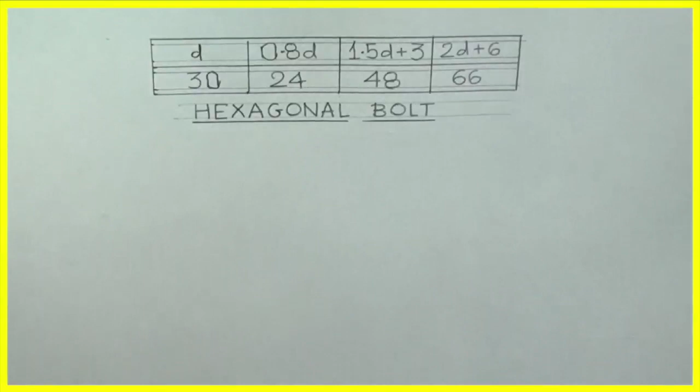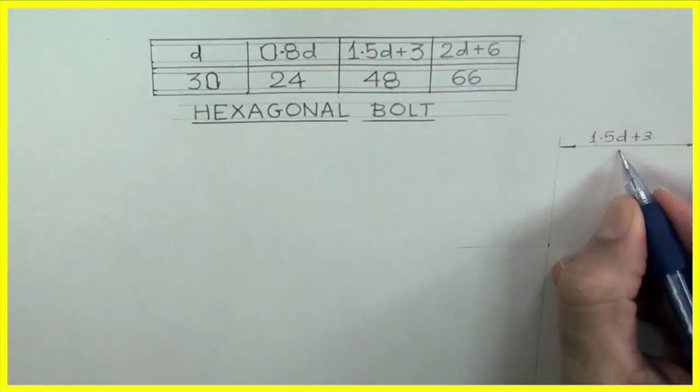Hexagonal bolt, D is equal to 30. So 0.8D, 1.5D plus 3 and 2D plus 6. We'll find out all these values and we'll start with side view. 1.5D plus 3 we will take. See, we can take 1.5D or 1.5D plus 6, but we will take 1.5D plus 3.

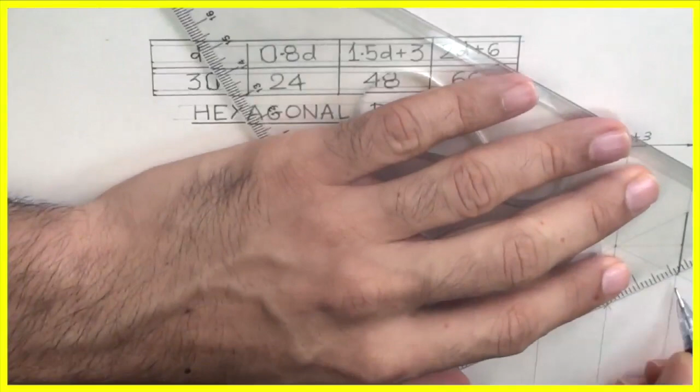And we will draw hexagon across flat. We'll draw 30-30 degree on both the sides and we'll get the side of the hexagon. After taking this side, we'll cut on middle line like this and we will get hexagon. Now why are we starting with hexagon? Because axis is parallel to HP and VP. So side view will give you true shape. So first we will draw hexagon.

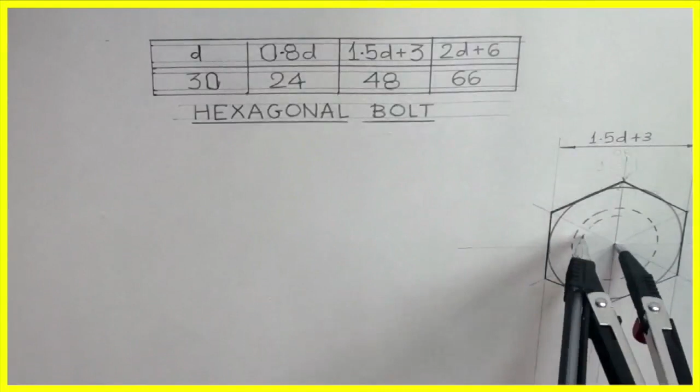After that we will draw chamfering circle. In nut and bolt we have a chamfering circle. So we will draw chamfering circle. After that we'll take D equals to 30. We'll draw this dotted circle and again we'll take 0.8D. That also we'll draw as a 3/4 quarter circle. See, diameter 30 and diameter 24. After that we will go for head of the bolt.

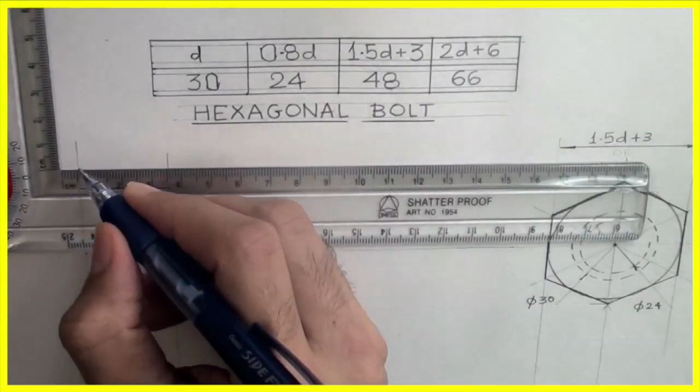We'll project from side view. We are drawing front view now. See this. This is 0.8D. It can be anything from 0.7D to D. So I am taking 0.8D. Then I am taking these two lines. Right? Now I'll take 60-60 degree with vertical. Wherever it will cut, from that point I can draw this middle radius. See this.

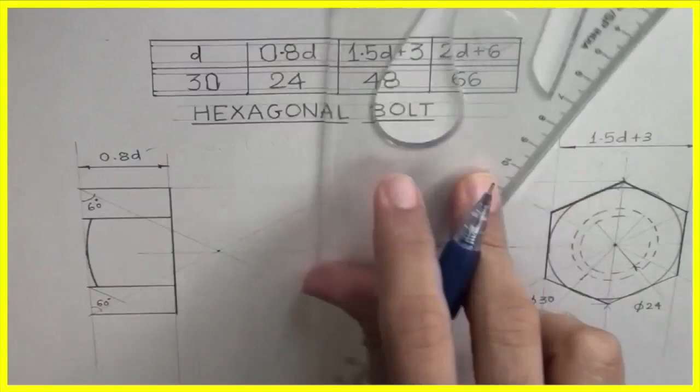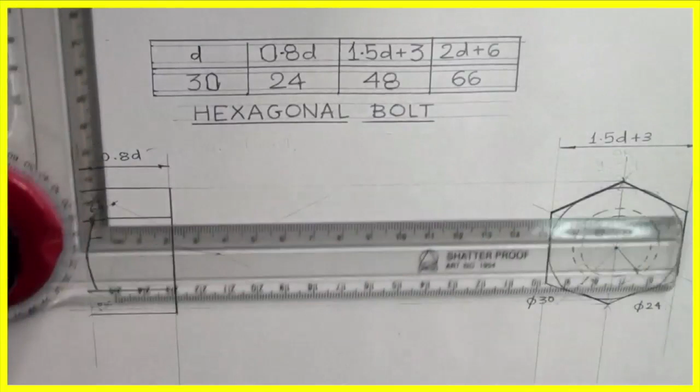Same way again I will take 60-60 degree, right? And I'll get these 2 points. See, this is the main radius, right? We took 60-60 degree from the corner and we got this radius. Now same way we took 60 from here, 60 from here. Now you draw line from side view. See this. From the chamfering circle you project.

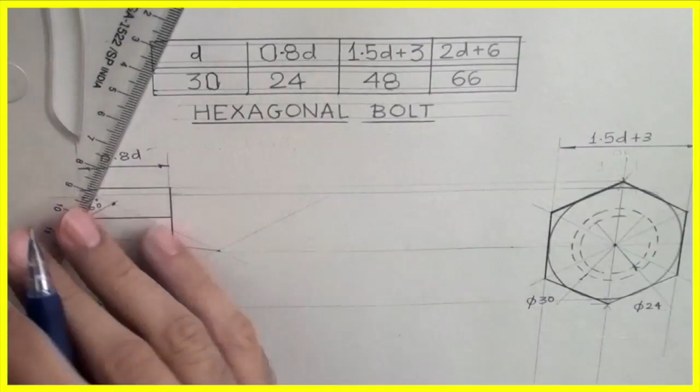Wherever it will cut, from that point we will take 30 degree with vertical. This is chamfering. This is very important. See this. So from that point I will draw 30 degree with vertical. And we'll do it on the upper side also. Right? And now from this point I will draw radius and it will touch that chamfer. See this. We'll draw this radius.

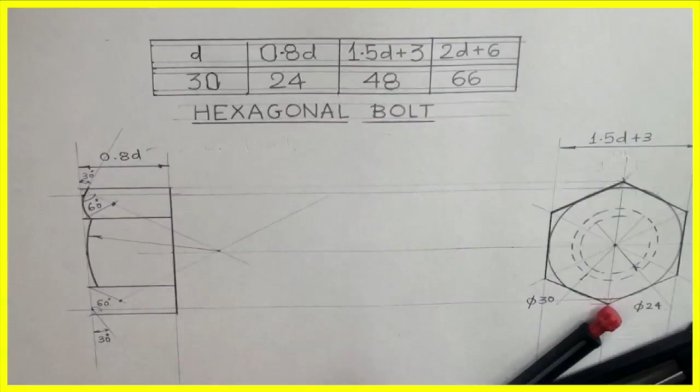See, from this point to this radius, we'll draw this curve and then it will be a tangent. Same on the bottom side. Again we will draw radius and we'll draw tangent. So we are done with hexagonal bolt head. This is head of the bolt. So this much is done.

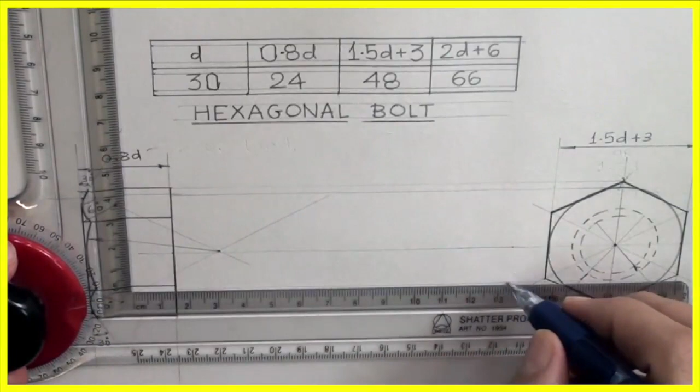Now we'll draw threading part, shank length, which is 120. So I will draw 120 mm long line and I will take, see, this is shank length and I'll take D and I will draw this radius. See this, now I'm projecting this diameter.

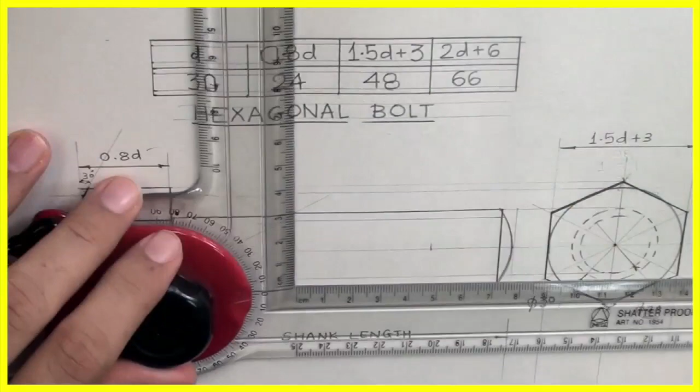Now I'll take 2D plus 6. The threading length is 2D plus 6, right? So we'll take 2D plus 6 and we'll draw this runoff angle, which is 30-30 degree. See this. So threading length is 2D plus 6, right? So that would be how much?

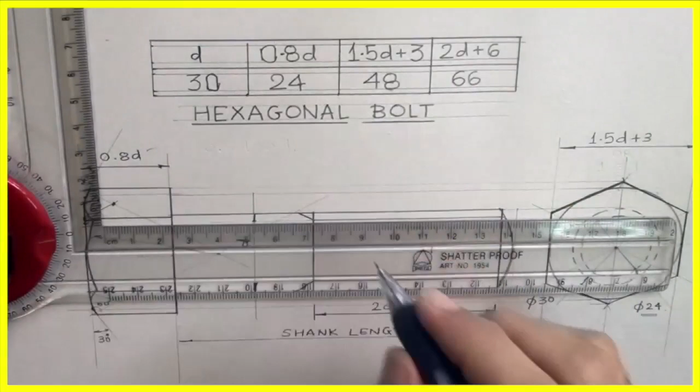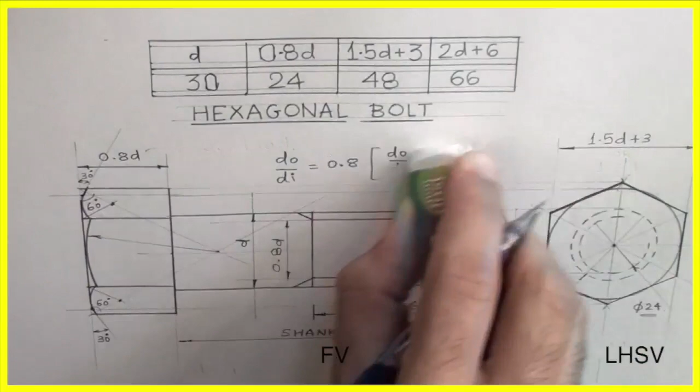Diameter. See, this is D, right? And this inside one is 0.8D, right? This is front view and left hand side view. Now if you see, DI by DO is 0.8, but it can be 0.84 also. DO is outer diameter and it can be 0.85 also, but I am taking DI upon DO, which is DI upon D, equal to 0.8.

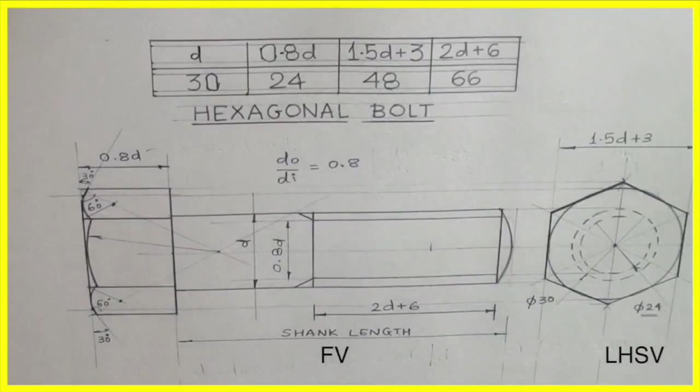And if you see in this case, when you see from the front, you can't see threading, so that's why it is dotted in side view. If it is right hand side view, then it will be other way around. Then the threading will be dark and the chamfering circle will be dotted. Thank you. This is very important from the CBSE, diploma and ITI students point of view.